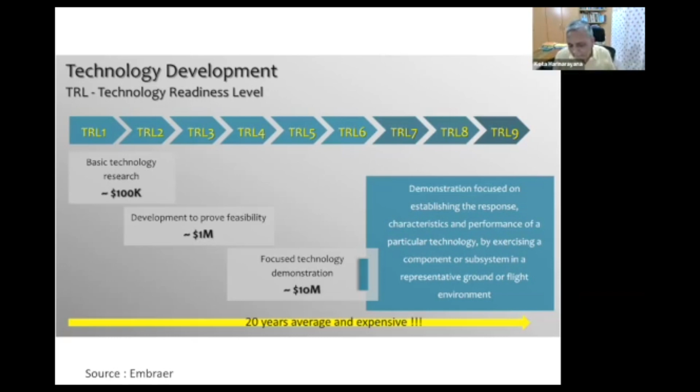So as I've shown here, basic technology starts at $100,000, then you come to 1 million, then 10 million, then 100 million, then billions. You need at least 10 million to demonstrate in a meaningful way, and then only can you go to subsystem and system development, which goes into 2 billion, 3 billion—that is the kind of thing that happens. So this is the characteristic of time, technology development, and money. I'm showing this slide to show that when you come to that TRL level 6, where investments are very high, quite a few programs died.

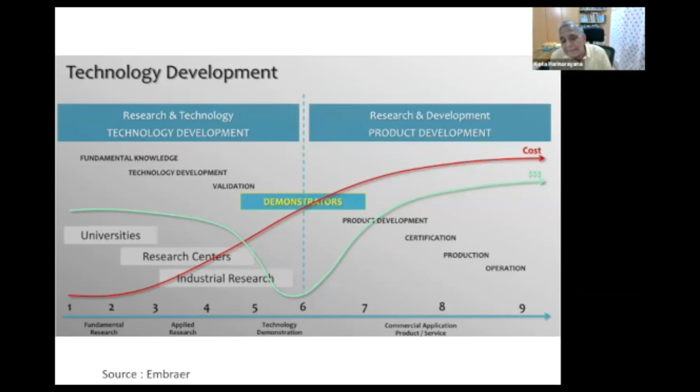Okay, so we have to overcome this kind of a death scenario. Hundreds of programs have died. So we had a big challenge here. And as I go by, I'll be able to say how we got into the problem and how we got out of the problem. Today, of course, we're in a much better place.

I want to give one example of Eurofighter Typhoon. This fighter was developed jointly between UK, Germany, Italy, and Spain, 4 countries together. And it took them something like 25 years, where first flight on a Jaguar fly-by-wire system, which is the new technology, they did from 1977. Then they took an experimental aircraft program, and that went on from 83 to 91, full-fledged development program. That went up to 2008, continuing further EOC1, EOC2, and all that. So you could clearly see, with all the giants in the field, all 4 countries have got very high expertise, technology base, and legacy of developing aircraft.

But that is the kind of time it takes for development. I'm telling this because in India, because of lack of experience, there is a lot of criticism about the time taken for the LCA program. And this is what it takes. Now people realize that was the criticism earlier, but not so.

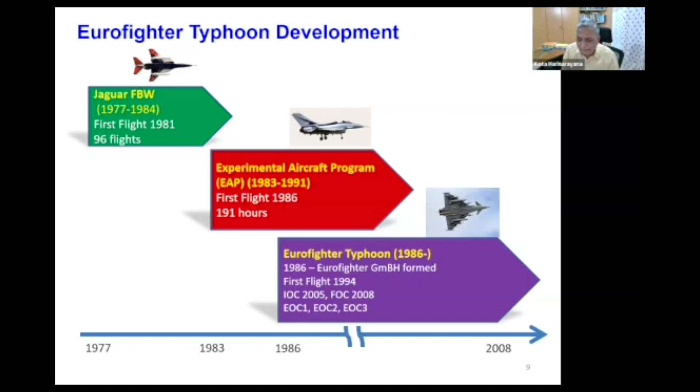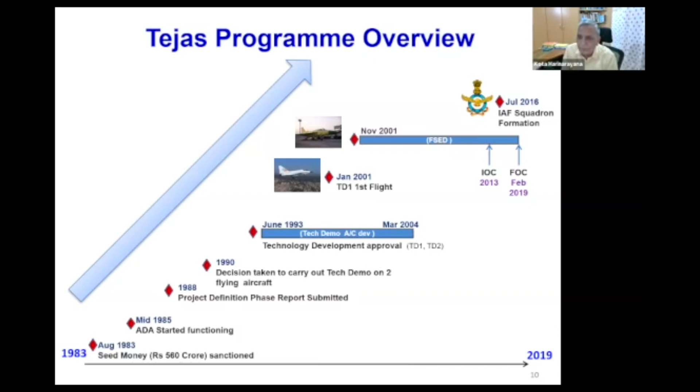So if you see here, we got at least seed money to get on with the technology development in initial studies. But it was only in 1993 to develop the technology on a new aircraft. Again, technology is not operational aircraft. We got the clearance, and it is only in November 2001, after the technology demonstrator aircraft flew, that we got the clearance. Then it took us almost another 12 years to make the IOC. FOC and all were going on, we continued to do that, but the IOC is the most important. So that is the kind of time frame it takes, from 1993 to almost 25, 26 years later, from the technology demonstrator program to the final clearance. So this is what it is.

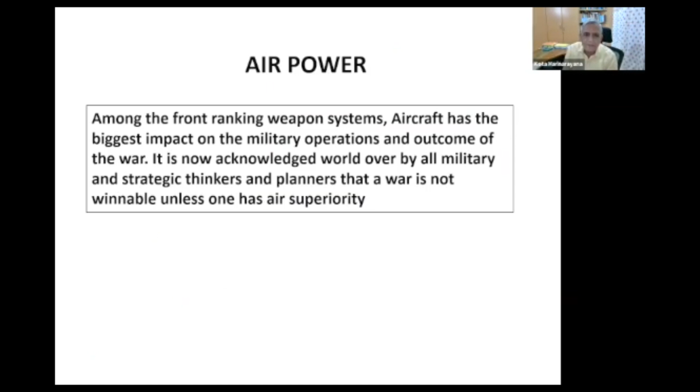Now let me go to 1 or 2 more slides. Among the front rank weapon systems, aircraft has had the biggest impact on military outcomes of war. You are now seeing the Ukraine war, the impact from manned to unmanned. You just can't manage a war unless you have superiority in air power. This is what is required. And we're seeing in all wars what happened: where there is no superiority, there is no winning.

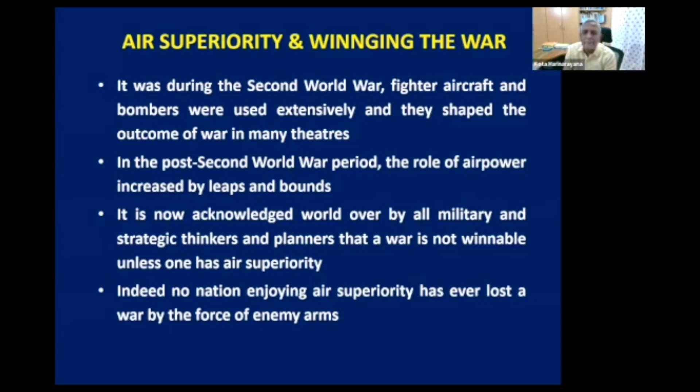Of course, the biggest impact of a fighter came in the Second World War. And in the post-Second War period, the role of aircraft increased by leaps and bounds, orders of magnitude. Now it is acknowledged by all military and strategic thinkers that a war is not winnable unless one has air superiority. No country has ever lost a war by force of enemy arms, whether USA or any other country, if they have air superiority, they never lost a war. That is what is important. So air power is the most important thing for winning a war.

So after the Second World War, there was a lot of effort, investment, and technology development in fighter aircraft. The first generation fighters were 1945 to 1955, soon after World War II. They were all subsonic aircraft, flying below the speed of sound. First generation jets carried guns, bombs, and rockets. Missiles had not yet come. There were no radars or advanced sensors. So this is the first generation.

The second generation came in 55 to 60. Supersonic flight arrived, first generation radars came, first generation missiles came, and guns continued. There was a lot of debate whether guns were required or not, but somehow guns continued. In fact, the first MiG-21 aircraft, Russian design, didn't have any guns at all, but the Air Force insisted there should be guns, so they retrofitted it. So now guns became part of it. This is what happened — you had the MiG-21 aircraft come into the market, then F-104, F-86, a lot of American aircraft came in. They had a stellar role in all these things.

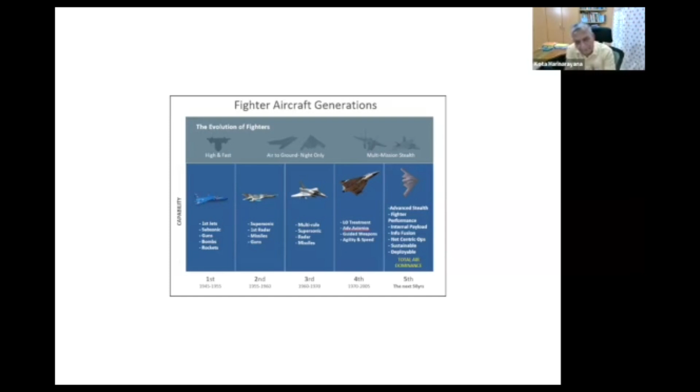Now the fifth generation aircraft are all under development. This is the direction fighter aircraft are going all over the world. Today the Russians, Americans, Europeans, and Chinese are doing it, and the Indians have entered the field with the fourth generation. We are now going ahead with the 4+ and 5th generation kind of thing.

So until the Light Combat Aircraft came, all the fighters - short range, medium range, long range - were imported aircraft, either manufactured under license or imported. For example, MiG-21 is manufactured under license, MiG-23 is imported, MiG-27 is manufactured under license, MiG-29 is imported, Jaguar is under license, Mirage 2000 is imported, Su-30 is made. Only the trainers were made indigenously, but trainer technology levels are much lower than a fighter. That is the scenario in which the light combat aircraft program started.

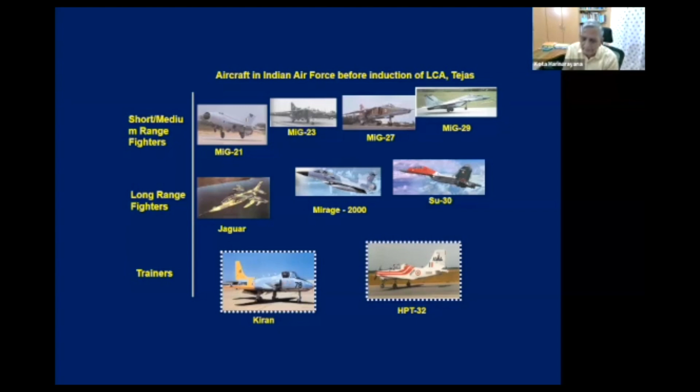I will give you an overview of the light combat aircraft so you understand what it is, and then we will have a discussion together. It is a 4+ generation fighter aircraft, comparable to the best aircraft available in the world except the stealth fighter. It has the best technologies and capability, and is proving itself very good in the Indian Air Force, and is also slowly being appreciated by air forces around the world. Let's see what happens.

So from the first generation HF-24 aircraft, which was tried to be developed in India under a German design team - they wanted to make a supersonic fighter but couldn't, it was only subsonic, and it had only first generation capability with no radar and no missiles, only rockets and bombs and a gun.

From there, in 2001 when we flew, we moved from first generation to 4+ generation. We had a lot of innovation in composite materials, and total fly-by-wire in an unstable aircraft to improve its agility and maneuverability, with very advanced digital avionics. The first generation code was a totally analog aircraft, while this is a totally digital aircraft - all systems, including mechanical systems, are computer controlled. So this is the jump from first generation to fourth generation.

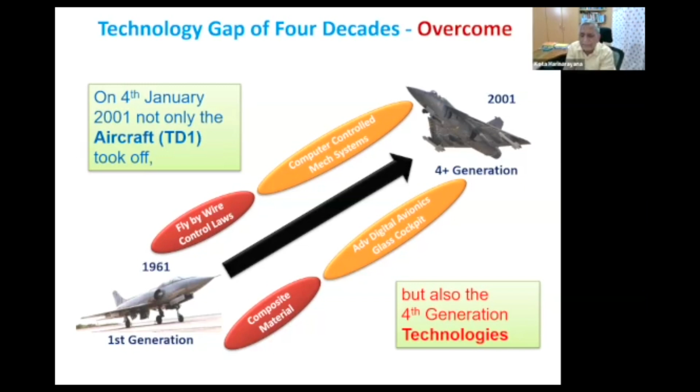And before that, in 1990, when we presented the program to the Indian government, India was going through a difficult phase. They had no money. So we had to wait until 1993 to get the money. We had a series of such challenges. The project has gone through a very interesting phase, but it has come out of that.

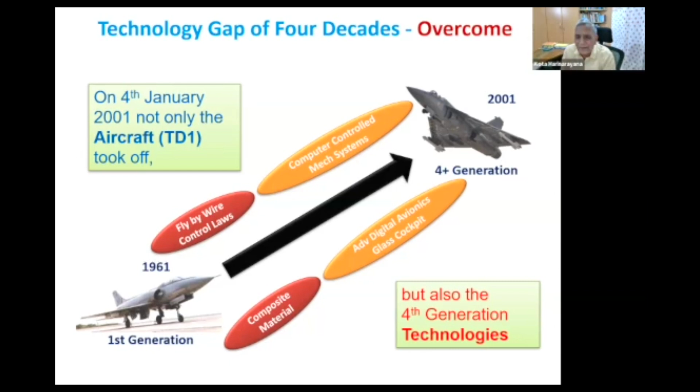So these are the basic technologies. I will not go too deep, but give you a rough idea. All the systems, mechanical, electrical, hydraulics, everything, are dual redundant systems, and all are computer controlled. This is the first aircraft of its generation which is computer controlled. The previous aircraft like Mirage 2000, F-16 and all, didn't have that kind of thing. Later on they updated it, but this aircraft flew with that first. And it's a very advanced, 100% digital aircraft. There's no analog system at all.

For example, the Rafale aircraft, which the French developed, has a fly-by-wire system that is a hybrid with digital and analog. But we had to jump from total analog to total digital. That has its challenges and problems, but it also gave us some benefits. So this meant a lot of technology development that we had to do.

We had not done any work on composites or advanced components before, so ab initio we developed everything - the material development, the technology development, testing, validation, all of it. Our brakes were, until we developed this aircraft, all copper-based or iron-based. So we had to go straight to carbon-based discs, which had its own challenges.

And this aircraft is an unstable aircraft. That means if the fly-by-wire system fails for more than 300 milliseconds, the aircraft will become uncontrollable. So the reliability required was orders of magnitude higher, and that needed to be mastered. While the US had given us the engine, when it came to the control laws, they refused to give us those, so we had to develop all these things on our own. These are the kind of challenges we had to face.

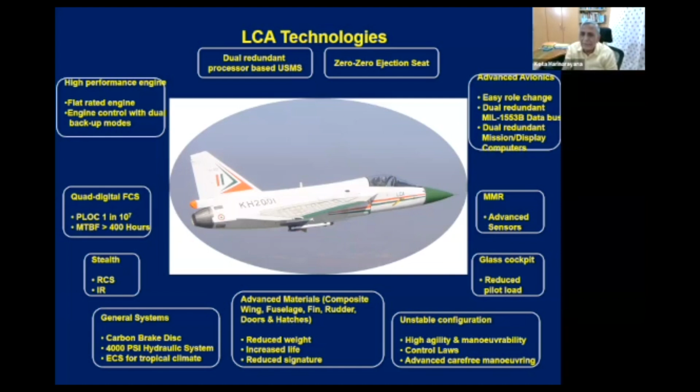I'll quickly show some of these. This aircraft is almost 45% composites, and we started with zero knowledge. Now this aircraft is among the few with the highest percentage of composites, until the 787 came, which has almost 50% by weight. So otherwise this was an aircraft with a very high percentage of composites. I do think the next aircraft we fly will have even higher composites.

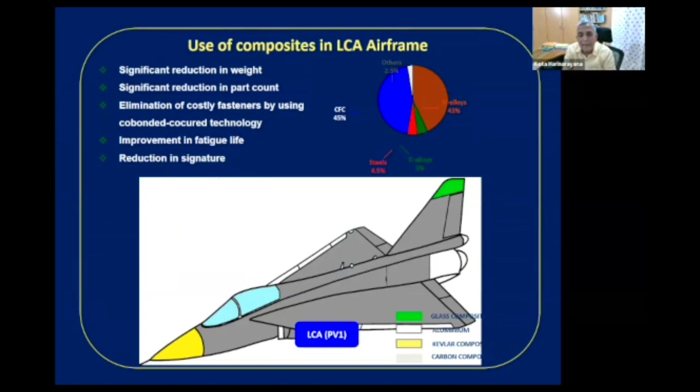The fly-by-wire flight control is one of the most difficult technologies. Initially the USA gave us the go ahead to buy the items, but they said they can't give us the control laws which control the aircraft - those we developed on our own. But they allowed us to test them on one of their aircraft, which gave us very interesting results.

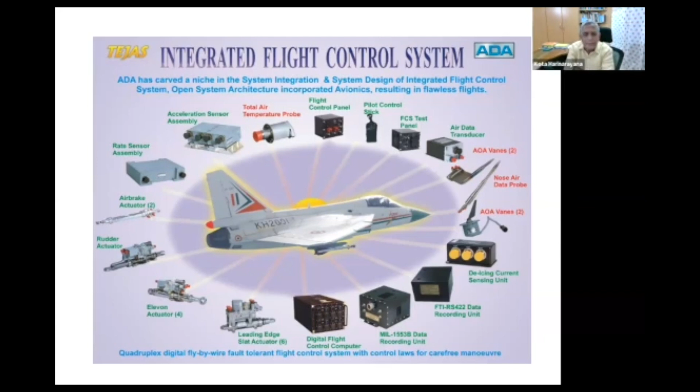When the aircraft started flying, most components were imported. Today, all of them are indigenous - all the technologies have been developed. The cockpit is digital, and like today most cockpits are digital, but this aircraft was the first digital aircraft which we developed and flew.

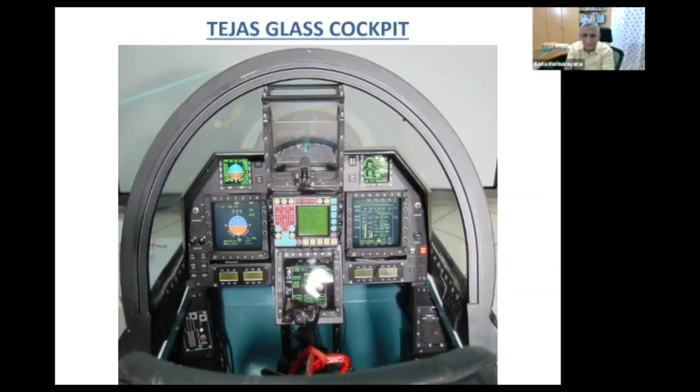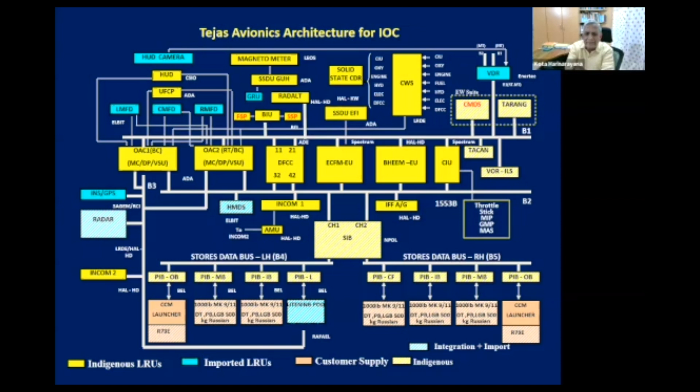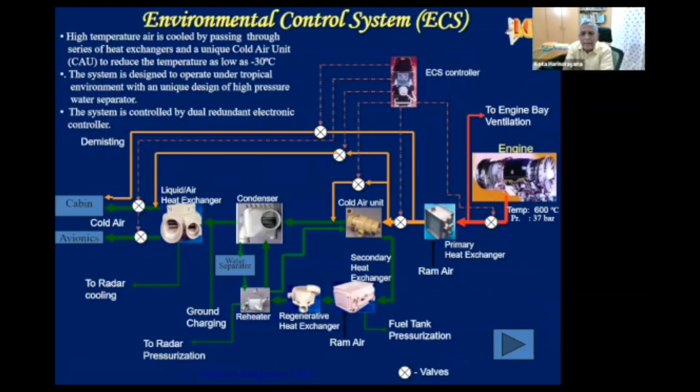What is important here is the avionics flying this aircraft - navigation, everything including utilities - most of them have been indigenous, except one or two minor things. Everything else is indigenous. And the environment control system, right from day one, we developed all the components and subsystems and made it fully operational. The Indian industry is manufacturing all of that.

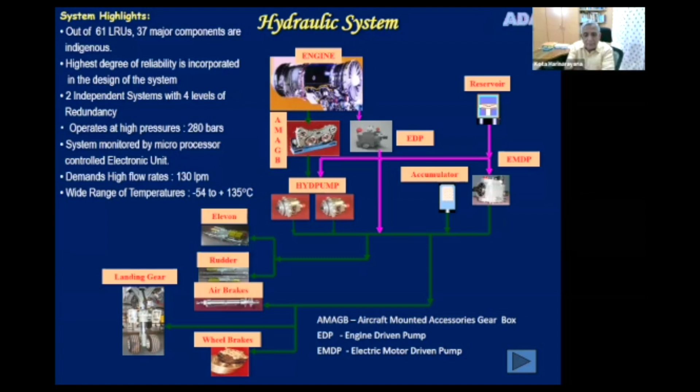This is what you call the secondary power system. It has the gearbox that connects the aircraft with the engine, and something like an APU which will start the engine. All these items - accumulators, reservoirs, everything - have been developed, including the landing gear. The wheel brakes and brake management system was one of the challenges; it took a lot of effort to make it perfect. But today, the technology is available with us.

In fact, some of these things - it's not only the development of the equipment, but the test facilities required become much more complex. Sometimes I feel that took longer and was more challenging. For example, the aircraft mounted gearbox which connects the engine with the aircraft.

Critical because there's no redundancy here, it has to work. Developing this was done by one of our sister labs called CVRDE near Chennai. It was a tough job, but they've done it, and it was a very important lesson for us, how academia, industry and all collaborated. I will show you a little more on that.

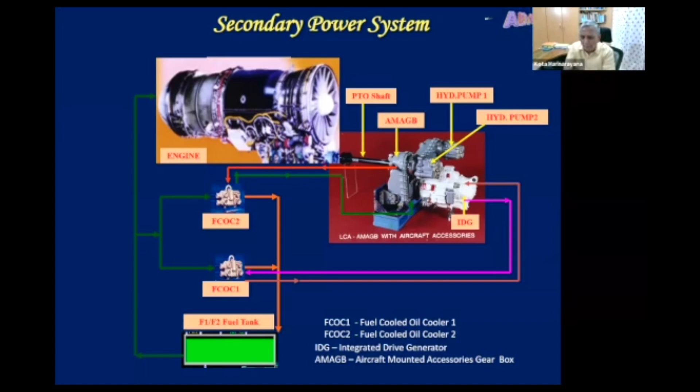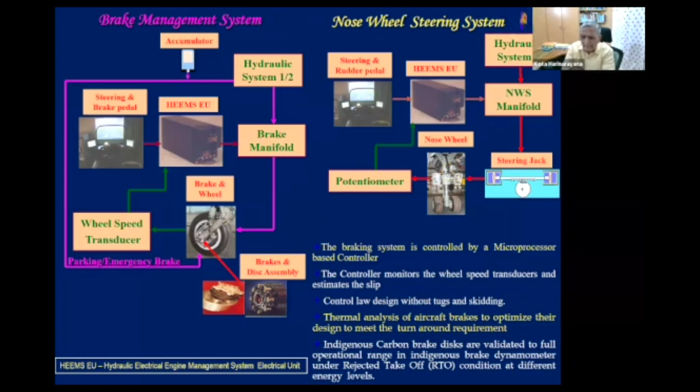I was mentioning to you about the brake systems. The complete wheels, brakes, landing gear, everything was developed from scratch, with state-of-art technology with carbon brakes and the brake management system. It was a big challenge, and we had tremendous collaboration between academia, industry, and R&D. It is one shining example of that collaboration.

Big challenges - you may make equipment, you may make subsystems, but how do you integrate them, how do you put them together to make the aircraft safe and also have the high performance required? It needed an enormous amount of test facilities. We had about 100 test facilities developed from scratch, nothing was available. I want to show you the Lightning test facility, the Iron Bird, fuel test rig, environment - all very high fidelity hardware and software simulation were done. In my opinion, it is these facilities that gave the reliability and integrity required.

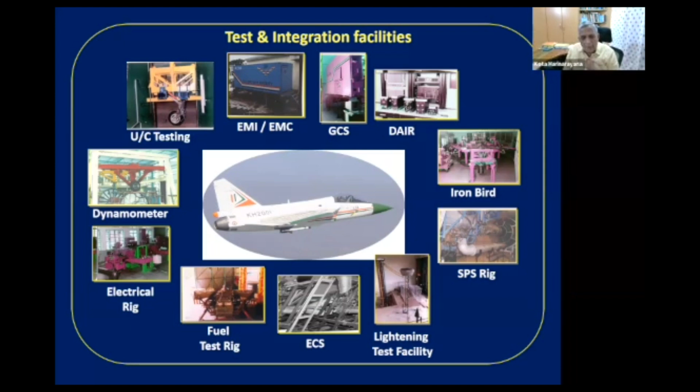This is possibly the only fighter developed in the world which has flown for the last 22 years without an accident. Whether Chinese, Russian, American, British or European, all of them had accidents, but this is the only aircraft. I give a lot of credit to our controller teams and others, but also to a lot of test facilities that we have created.

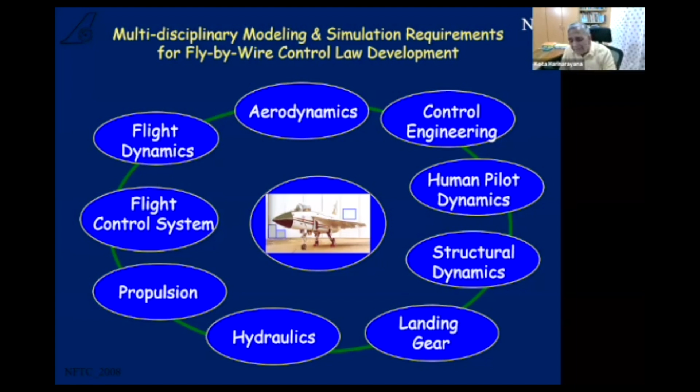Simulation was our backbone - we did a tremendous amount of work in this area. I think this is one area where the role of academia was extraordinarily high, right from simulating the aerodynamics, controls, human pilot dynamics, structural dynamics, landing gear dynamics, hydraulics, propulsion, flight control. Tremendous work has been done. We formed a national team with industry people, R&D people, and academia all working together, and this is a concrete example of how putting all the teams together has really worked well.

We used not only simulators built in India - for example we had a design simulator at NAL, a handling quality simulator at one of our labs called ADE - we also used the simulator at BAE in UK. We built the Iron Bird, a hardware-software simulator at HAL, our industry partner. We also used an in-flight simulator, Calspan, in the USA. In fact, the first control law was tested in that simulator, and it gave us very good inputs and very good results.

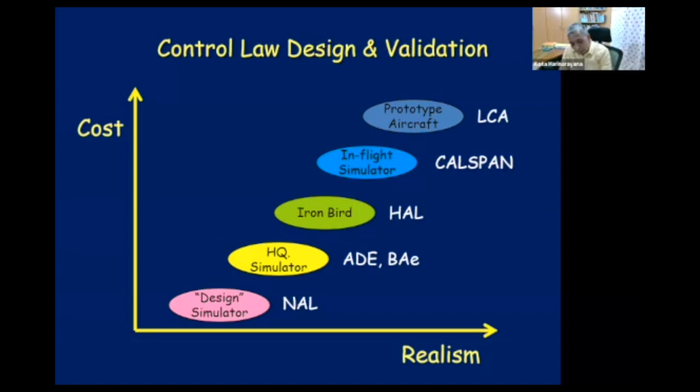It gave tremendous confidence to our pilots. In fact, one of the pilots who flew our control laws on an F-16 aircraft is a Pentagon pilot. He made a jocular statement that the F-16 flies better with the LCA control laws, which gave a lot of confidence to our people, pilots and engineers.

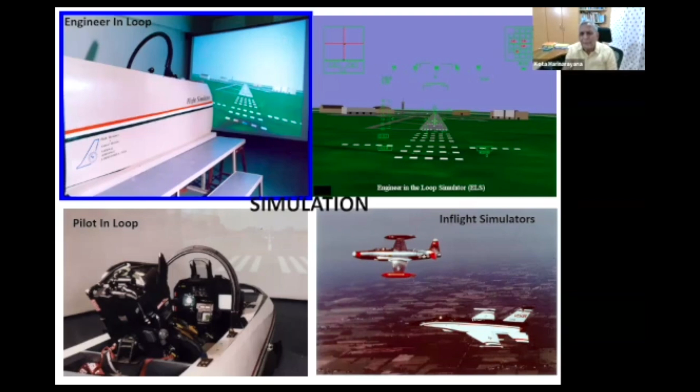So these are the kinds of simulations, from ground simulation to in-flight simulation - a tremendous amount of development work has gone in. I'm mentioning this because these simulators have played a critical role, along with other test facilities, in bringing the control laws to the perfection that was required. Today, the controls of the LCA - whoever has flown it considers it perhaps the best control they have ever flown, and people have flown 40, 50 fighters. We have to give a lot of credit for this.

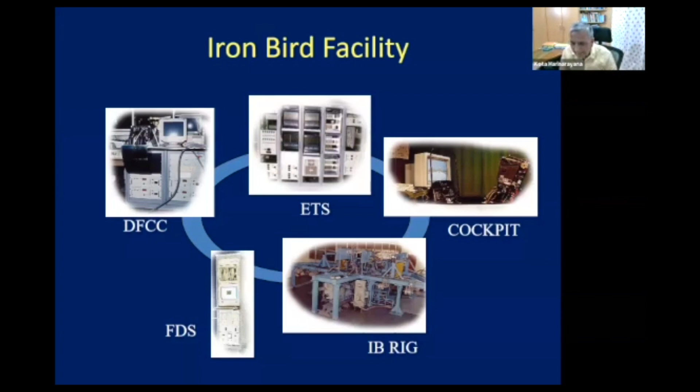So this is the Iron Bird, which has both hardware and software. It took a very long time for us, but today it is one of the backbone pillars of our program.

Our whole aircraft - 90% of it is made out of carbon composites, and carbon is not a good conductor. So we had to design conductivity into the composites, then develop the design technologies, then test them, because the whole aircraft has to be tested with the complete system working. That is where we had to do high voltage tests, high current tests, fuel ignitability tests, indirect effects tests. All these test technologies were developed at the Indian Institute of Science, and they did a marvelous job.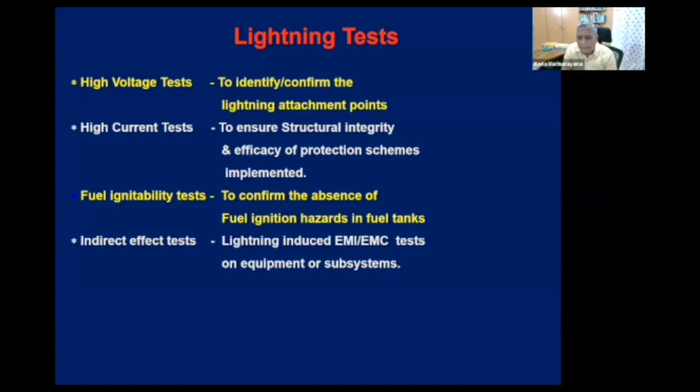When the facility became operational, I was told this was the best facility available in the whole world. The credit should go to Professor Nagbhushan and his team at Indian Institute of Science. You have to generate a million volts and million amperes for maybe a fraction of a millisecond, but that needs to be done. And this has been done.

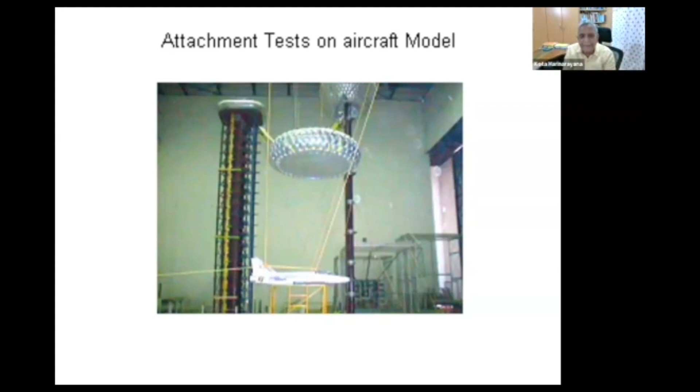The whole aircraft has been tested with completely systems on in this facility. This facility is now the backbone in our country, and many aircraft have been tested. The whole wing had to be tested because for lightning test, the wing is completely composite. Creating that test facility was a major challenge, but I'm happy to say Professor Nagbhushan and team helped the design team, and we did a very successful test.

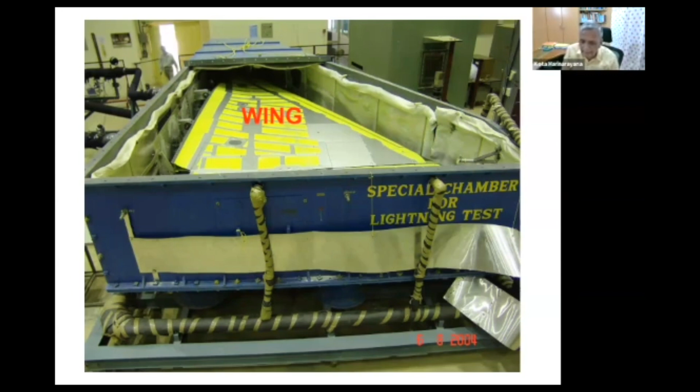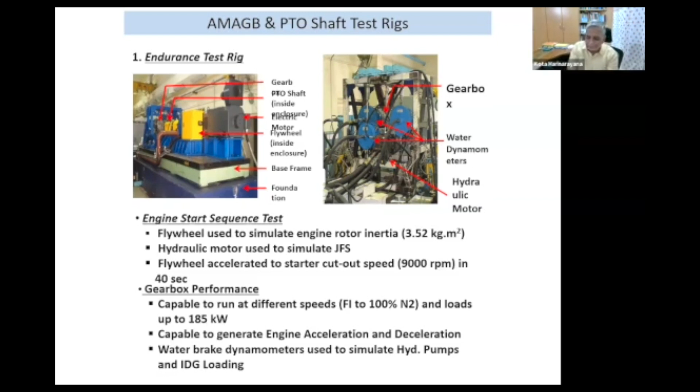I wanted to show some of the gearbox. In fact, I find that developing the gearbox and getting it certified was as difficult a job as designing the gearbox itself, because it's a safety critical one. I think the job was done extremely well by our friends in the DRDO, and there was a lot of collaboration between the industry there and IIT Madras.

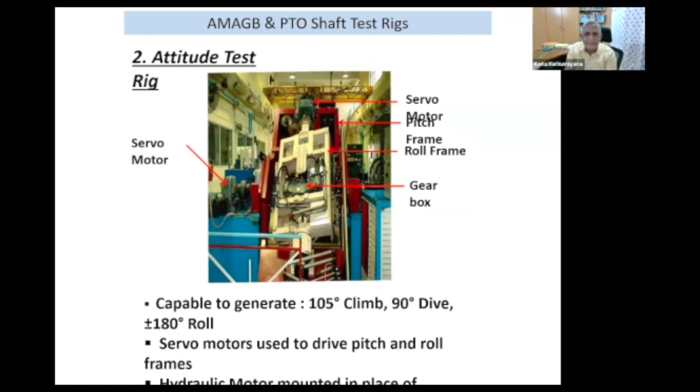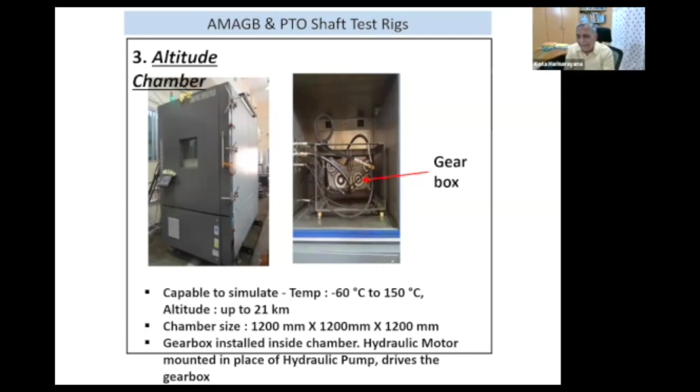This is the altitude test, because you have to test in all conditions. Very beautiful test facilities have been created there. This is the altitude test chamber. The whole gearbox was put in right up to 50,000 feet altitude, temperature, pressure, everything was built, tested, validated, and the gearbox has given fantastically good performance without any problem.

When the LCA Mark I started, our technology base level was only that of a first generation fighter, which is virtually like a metal aircraft, analog systems, mechanical. We jumped from there to a level where today we have a technology base compatible with the best in the world. The key technologies are designing an unstable aircraft, aerodynamic design, fly-by-wire flight control, algorithms, software, computers, advanced avionics, both algorithms and software, and composite structure, a very difficult thing, but we have done it well. And computer-controlled systems, electrical, mechanical, and all.

Testing this aircraft itself was a challenge, and certifying this aircraft was a challenge. Creating facilities for design qualification of the technology itself was a challenge. All these were done in a single project. We didn't have any one of them before we started this program, so everything had to be done ab initio.

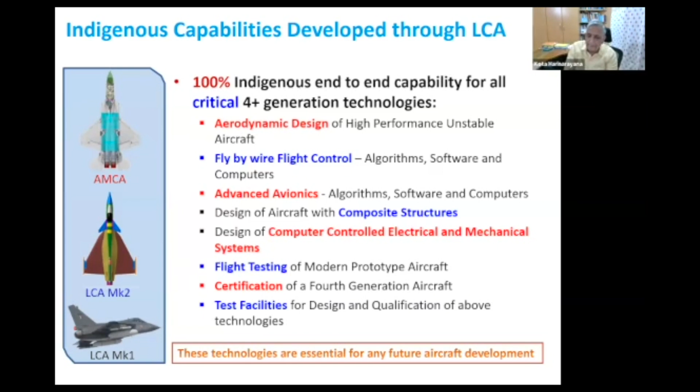I would like to spend some time and explain to you what we have done. While we were doing that, the Indian Navy said, why don't you design a fighter for us? So we developed the Light Combat Aircraft Navy, a naval fighter. This also is not a simple game. We have to take off and land from a carrier.

A 2 kilometer runway is there for the Air Force, and this is 200 meters, one-tenth of that. The aerodynamics is different, flight controls are different, structure is different, but all that has been done. You can see here, it has additional controls called leading edge vortex controllers. Possibly we are the first in the world to develop this for a naval fighter.

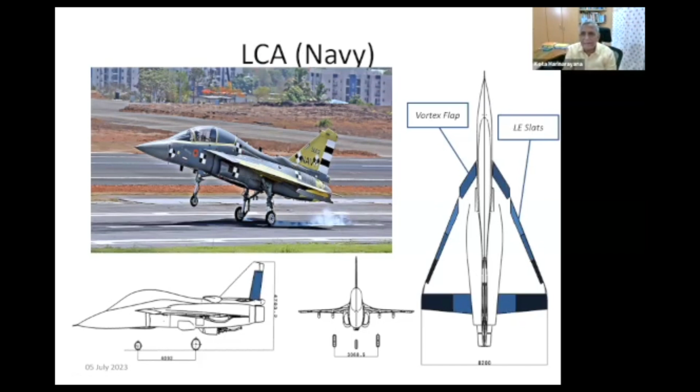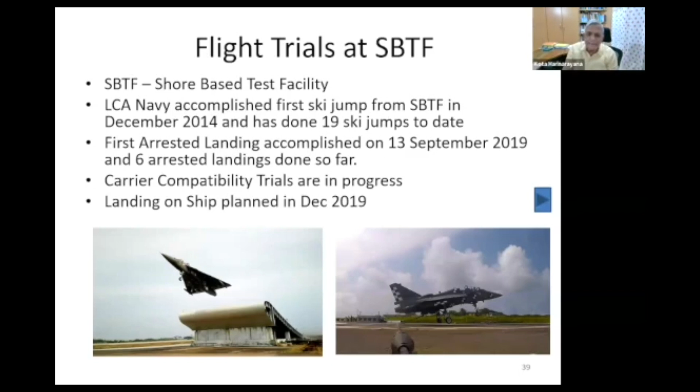It has flown successfully, and we have built a test facility to do that. You can see all the technologies, leading edge slats and all. We built a shore-based test facility where complete aircraft testing could be done, and then once it is proven, you come to the carrier. This test facility is now being used for Rafale, our MiG-29, all the aircraft that are there, because it's an excellent, world-class facility which anyone could be proud of.

As we are going ahead, there's Mark 1A with a better engine, better radar, better weapons, and all that is going on, it's part of the job. We also have the Mark 2. In fact, today the Mark 2 project has been cleared, money has come, and development work is in progress. It is almost 70 to 80% higher payload, and it has a GE F414 engine. You see the complete program.

One area where we have not yet got a fully certified engine is the engine for the Light Combat Aircraft. The indigenous engine is not yet ready or reliable enough with the kind of performance we want, which can go on to a single engine fighter.

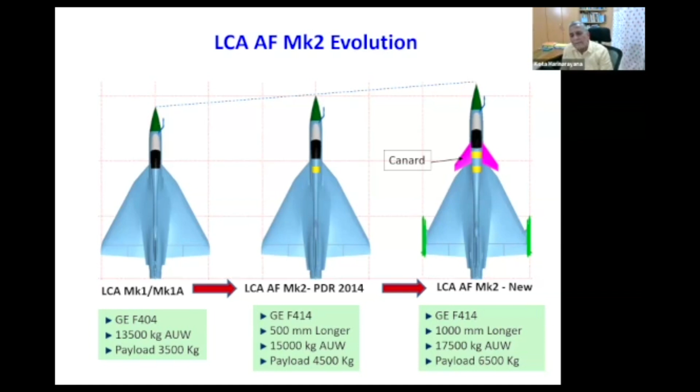We continue to use an imported GE engine, and a lot of work is going on there; I hope we'll succeed, it is work in progress. We have a 5th generation fighter, the design has been completed. It is a stealth fighter with next generation technologies, and it can fly.

It can be in non-flight mode, as shown here, or flight mode. There are no external weapons, all weapons will be internal. So this is the advanced medium combat aircraft. The design has been completed, but it's awaiting clearance because they are expensive.

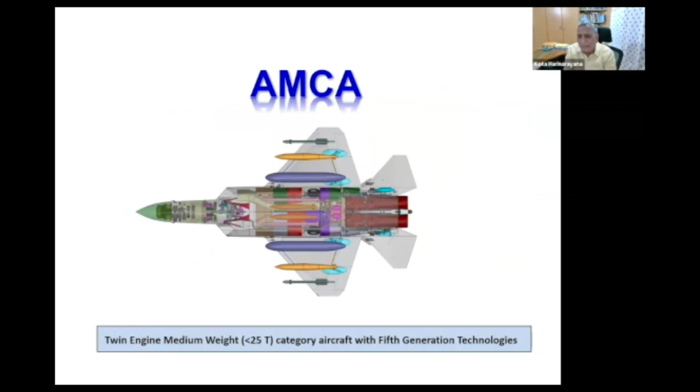A similar twin-engine fighter for the Navy is also in development. This has very low RCS, twin engine, much bigger, and it has to support net-centric warfare.

All these aircraft are now enabled with technologies that make them integral with the net. They have to be integrated with communication satellites, unmanned air vehicles, manned aircraft, combat unmanned vehicles, surface to air, air to air, and sea to air weapons—all put together. All these aircraft I'm talking about are compatible with net-centric warfare, including the LCA.

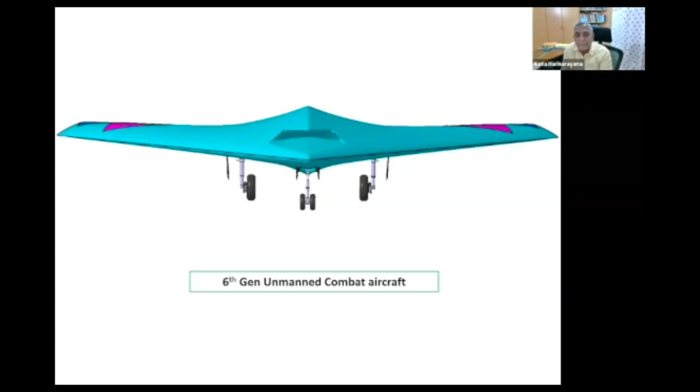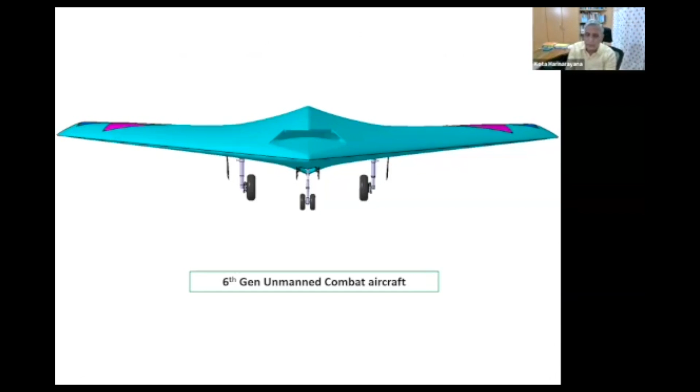This is the 6th generation unmanned combat aircraft—fully stealthy, and this is new technology work going on now. A lot of effort is going on, but this is on the anvil. I won't be able to talk much about it, but a lot of things are happening. It's a flying arrow wing configuration.

This aircraft will have our indigenous dry engine and an internal weapons bay. It uses a lot of technology we developed from LCA, the light combat aircraft, but also technology developed for unmanned air vehicle programs by our sister lab ADE, and a lot of mission sensors have been re-engineered.

This aircraft, including the engine, will be indigenous, and we're looking at manufacturing being done in a big way so that cost effectiveness is achieved. So starting from our base as 1st generation, we built a 4th generation, which became 4th plus generation, then 5th generation, then 6th generation—that is what is happening.

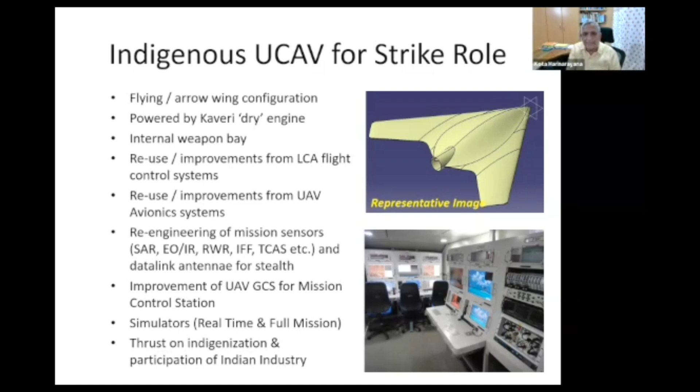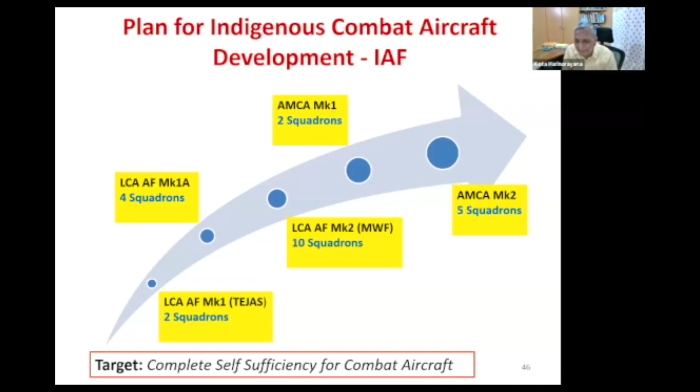This summarizes it: with LCA Mark 1, Mark 1A now in production, Mark 2 in advanced prototype development stage, and AMCA the 5th generation fighter, Mark 1 and Mark 2. Today the Indian Air Force is thinking of 100% indigenous fighters—from 100% dependency, we moved to 100% independency, and not only that, with technology comparable to the best in the world. So the LCA program is enabling the country, the Indian Air Force, and subsequently the Indian Navy, to jumpstart from total dependence to total independence. That is the outcome of the light combat aircraft program.

Now I'll tell you what we have done. I will spend a few minutes, then we will have a quick discussion on that.

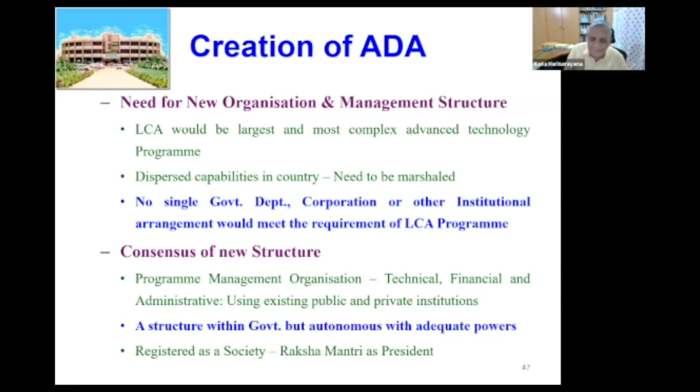This would be the largest and most complex technical program India has ever taken up. India didn't have any capability—no single organization had the capability. So a new organization called Aeronautical Development Agency was created. It is a structure within government, but autonomous with the required powers. It is registered as a society with the defense minister as the president, but made more autonomous so that we can take decisions at the project level rather than going to government for everything.

Normal functioning in a big organization or government involves goal setting, following a clear-cut plan, reducing risk, standardized processes, centralized decision making, and far-reaching authority for whoever is working. But we felt that way was impossible.

I took over in 1986, end of '85. I felt that incremental thinking, common in industry and government, would never allow us to develop from a first generation to a fourth generation aircraft with almost nil infrastructure in aviation in India. Some manufacturing at HAL was going on, but the technology level was hardly anything. So we had to have ambitious goals—from zero indigenous content to massive indigenous content, a very ambitious goal. We had to have a vision, because when I joined the organization, people said there was a 99% chance of failure.

You need to have a vision to do this. We had to learn where do we go ahead with the project. There was an extraordinary amount of learning, and it was not impersonal - we personalized the whole thing. People working anywhere in the country or outside, there was a personalization of the effort, and we empowered decision making. Instead of expanding authority, we expanded the influence. That is the key point.

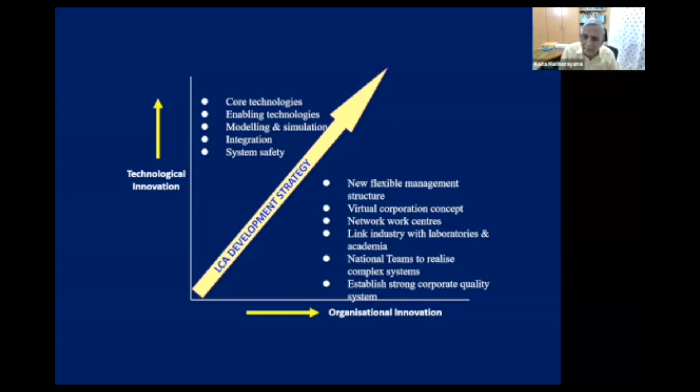As I mentioned, the whole country participated - hundreds of work centers, from small and medium scale industries to big industries, R&D laboratories like CSIR labs, atomic energy laboratories, space laboratories, DRDO, and most industries including small names, and all the major academic institutions, all the IITs and others, including organizations like PSG College of Technology - they all participated in a very big way, and their participation was not peripheral, it was central to the program.

We developed 3 types of people: specialists - a lot of analysis work has been done in academia and R&D there. But you also need people who are architects, system integrators, configurators - that is what at ADA we tried to build, both analysis and system integration capability. A lot of capability we developed at industry also, and a group looking at scheduling, budget, business, and all that. So if you are building an airplane, or anything, you need all 3 kinds of people, and this is the capability we built.

And all 3 learned how to make people work together - system thinking, what you are talking about as design thinking, that is what we built the capability for. That is the capability which is taking us from LCA to Mark II, to MCA, the 5th generation fighter, and all that kind of thing. And the network that has been created and the personalization that has been done is what is helping us move forward.

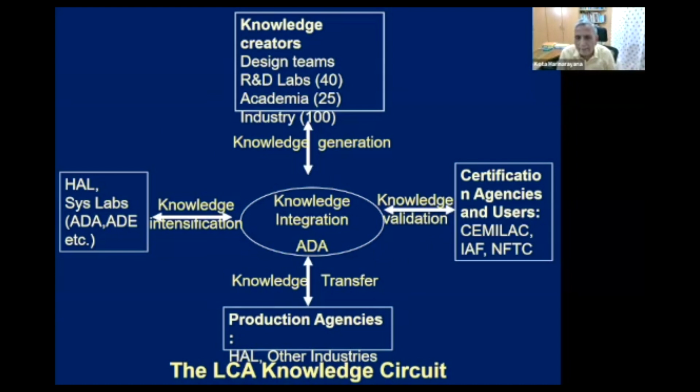So we had this kind of knowledge generation - as I mentioned, the design team, the labs and academia, work has been done there. Knowledge integration happened, and then knowledge intensification at system labs and HAL system labs. Then knowledge validation and certification, and knowledge transfer to the production agencies. So all 4 elements have been tried, tested, validated, and now the work is going on. There are always challenges, but work is going on.

The support system we created was a support system for innovation and knowledge generation, and that is what I believe is very important. It is the exponential thinking that we brought in, where people were willing to take a risk, willing to try a technology, willing to fail, but fail fast so that you are able to overcome, understand the failures, and build a good system.

All that has been done in a single program, and that is what is important. I think the legacy of this aircraft program is the support system for knowledge generation we have created, the technologies we have created, and the networking we have created. In India, that kind of network between academia, R&D, and industry was very little, hardly anything. This program has proved beyond doubt that such a network could be created, sustained over two decades, and could deliver goods, and that network is continuing to support the country moving forward. So I thought that is what is important, and that is what we have done. Let me now end it.

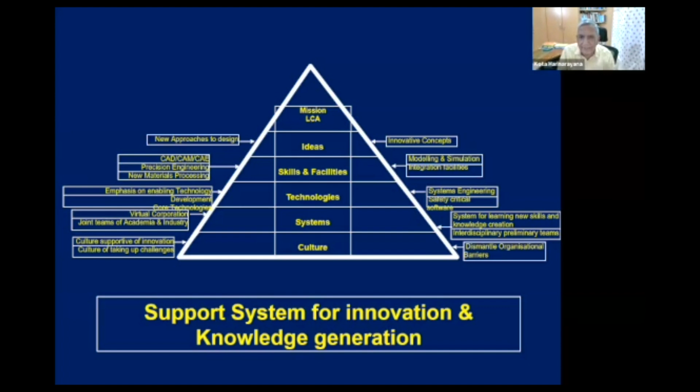Finally, one of the quotes I'd like to share: it is love for what you do. It is the passion. It is what drives you to go against any kind of roadblock or difficulty. You don't care about incentives of the company, the tools they give you, or the KPIs to measure you, because you are driven by passion, to do the right thing and change the world. I think this is a very nice point. I thought I'd end my talk with this, and we'll discuss further. So thank you very much.